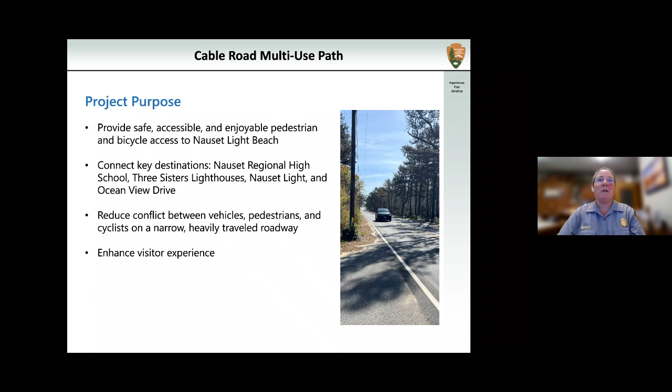You'll hear from Nate Ritchie from the National Park Service's Denver Service Center, the entity that supports parks like ours with projects of this scale, for the next few minutes. Nate, would you please start to walk us through what this project could look like? Thank you, Superintendent Flynn. Yes, I'd be happy to do so. My name is Nate Ritchie. I am the project manager for the Cable Road Multi-Use Path Project.

I'm happy to be with you this evening and tell you about the project. I'm going to talk a little bit about the need, the benefits of this project. We're going to talk through the design considerations, the things we're thinking about as we enter the design phase. We're going to look at the existing conditions, or essentially what is happening in this area now. And finally, we're going to end with the 2 concepts. Next slide.

So benefits of the project, we do anticipate a number. So Superintendent Flynn talked about safety. So we anticipate safer travel for pedestrians and cyclists along Cable Road. We anticipate safer travel for motorists as well, because we're going to remove those users from the roadway. We want to enhance access to Nauset Light Beach, to the cultural areas.

We want to support recreation and wellness programs, and ultimately we want to improve the experience for residents, for visitors, for students, really for anybody who's using Cable Road or Cable Road Multi-Use Path. Next slide.

All right, design considerations. So as we enter the design phase, we are thinking about a lot of things. And if we've missed something here, please place it in the Q&A. It's a perfect time to do so. We are thinking about adjacent residences. We will look at this in a little bit more detail, but there are a number of private properties along Cable Road. Driveway crossings, there are driveway crossings associated with those private properties, so we want to make those crossings safe.

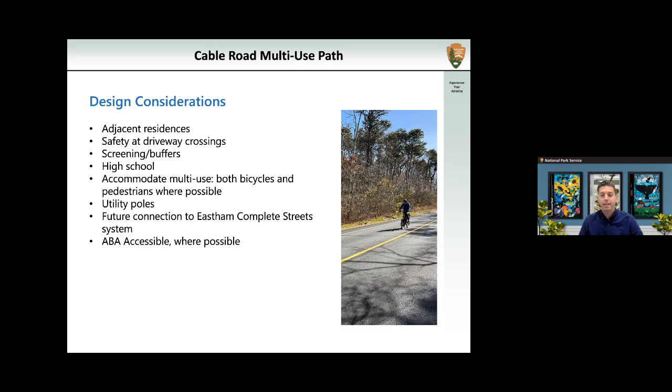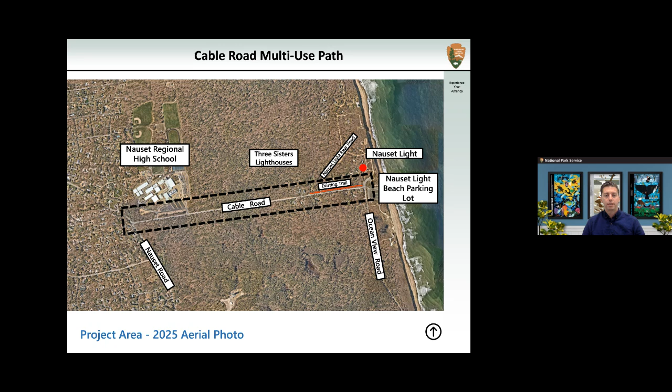So the project starts essentially at the Nauset Light Beach parking lot, and it will terminate at the intersection of Nauset Road. Next slide. We've broken this up into 3 segments, and that's how we'll talk about the project this evening. So going east to west, the first segment will be between the beach parking lot and the Three Sisters lighthouses. The center segment, number 2, is between the Three Sisters lighthouses and the high school. And the third segment is in front of Nauset Regional High School, and it terminates at that intersection with Nauset Road.

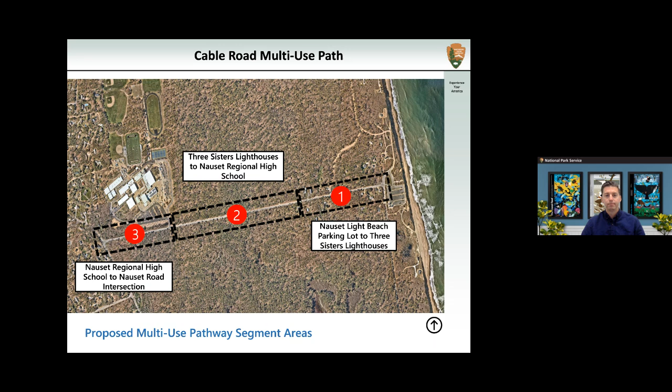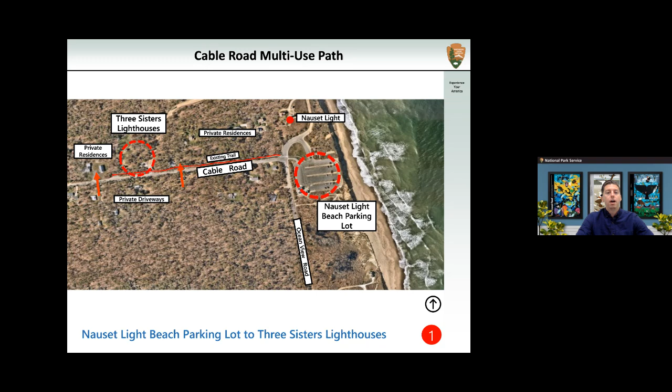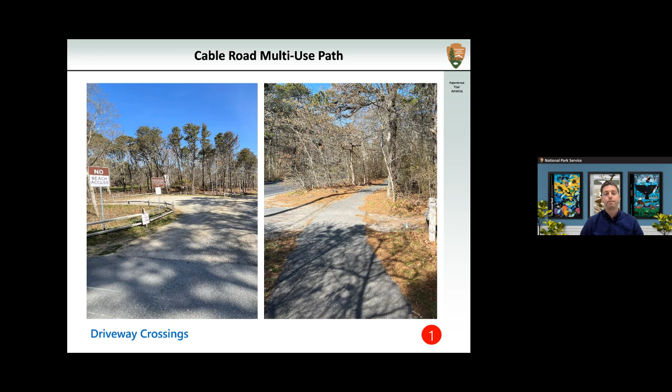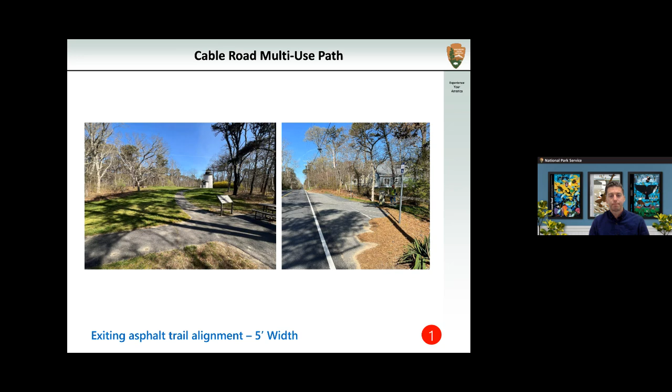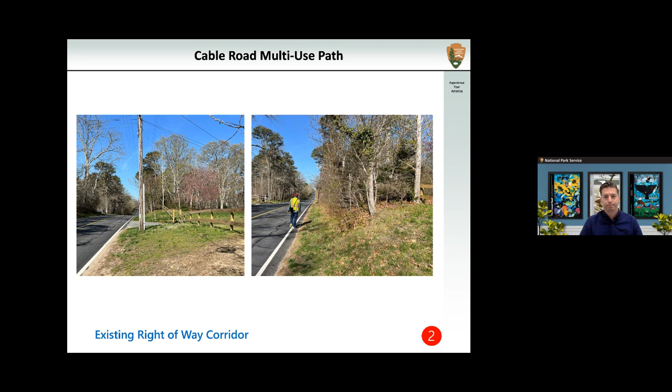Okay, existing right-of-way corridor here. So this is just a little further down Cable Road. We have an example of a private driveway, the image on the left. I will also note there are a few minor drainage features, flumes. There's an example of one of those on the right image.

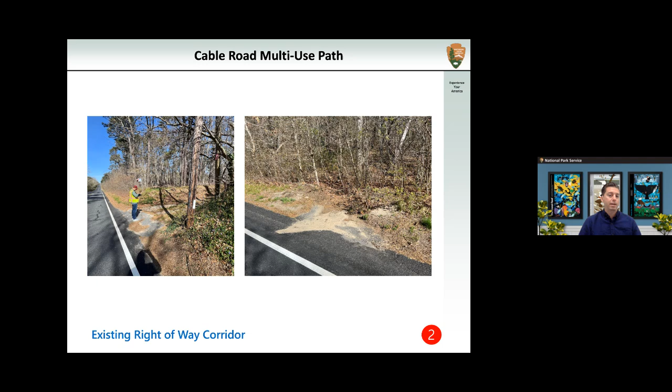And the last photo, we are considering a concept that moves the alignment of the multi-use path a little bit further into the wooded area. This is a sample photo of what that would look like. A lot of trees, a lot of vegetation. You can see just a little sliver of Cable Road to the right of the image there, but you get a sense that it is very vegetated in this area.

Okay, so this is the final segment. This is the segment in front of Nauset Regional High School. There are 2 entrances to the high school, to their parking areas. So this segment of trail kind of goes between those, and it will terminate on the left side of the screen at the intersection with Nauset Road.

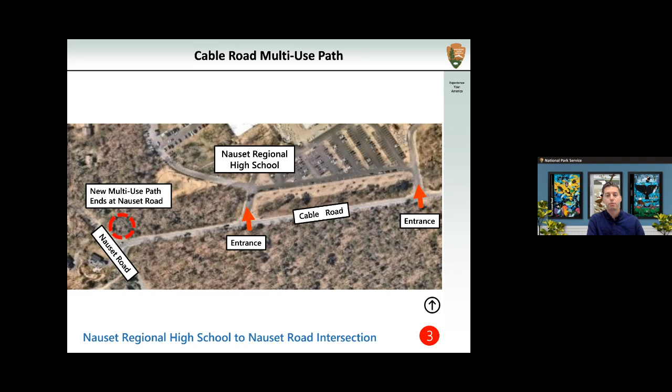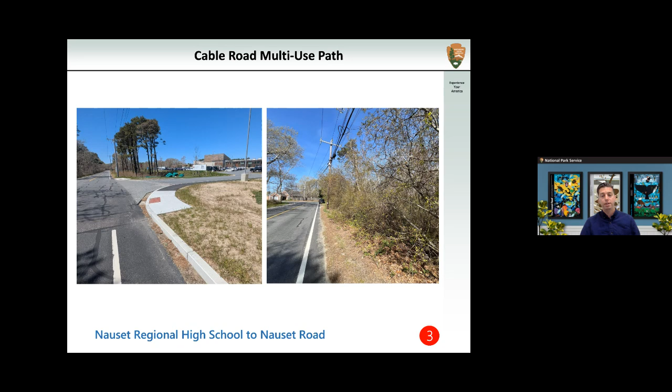So just one set of images here. What you're seeing on the image on the left, you can see the high school in the background there. There is not an existing trail in this area. However, there is a little bit of sidewalk, and that is associated with new construction of the high school. As you get beyond the high school, approaching Nauset Road, that's the image on the right, you kind of return to that wooded condition that we saw in segment 2.

All right, so let's take a look at the concepts. Before I dive into these, a few notes. One is that we are very early in the design process, so we would gladly welcome your comments at this point. These are not the final alignments. We are going to further define these and get into more details, but these are our initial concepts.

The second note is that you'll notice both of these concepts, which are the black dashed lines, are north of Cable Road. I do want to mention that we considered, but ultimately dismissed, an alignment south of Cable Road. There are a number of reasons for that. One is that there are steep slopes, sort of in that segment 2 area in the middle section of the road. There is a section of guardrail. There also were significant grading concerns with private driveways on the south. And one of the stated goals is we want to create connections to Three Sisters Lighthouses, which of course is on the north side of Cable Road. So for those reasons, we ultimately dismissed that concept.

So we're left with these 2. We've got the first concept, recreation, that's on the top of your screen. We've got the second concept, transportation, that's on the bottom of your screen. And you'll note immediately there are quite a few similarities between these, and there are differences. So we'll dive into those now.

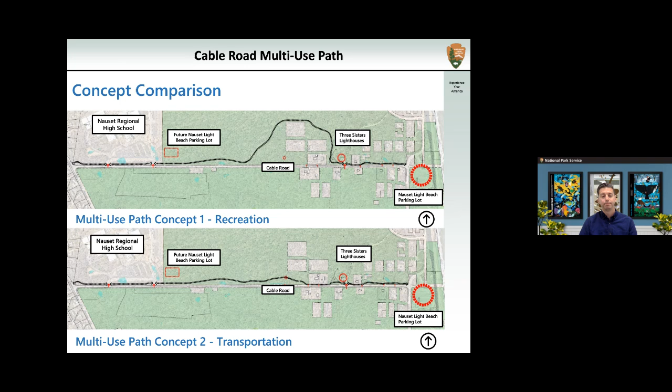We broke these up into the same 3 segments that we looked at for those existing conditions. So segment 1, again, is sort of between the beach parking and the lighthouses. Segment 2 is the center segment between the lighthouses and the high school. And segment 3 is the segment that will be in front of the high school.

So segment 1 is very similar for both concepts. It largely follows the existing alignment of the photos that we showed in some of the previous slides. We do hope to expand the trail slightly where possible to meet one of our goals, which is to provide access for both pedestrians and cyclists. But you will note that in this image, there are some areas, one in particular, where the trail is between Cable Road and a private property, and it will be more narrow in that section. It will be similar to what it is today, so adjacent to Cable Road.

One final note about this segment, and this is true of both concepts: the previous trail alignment went between some of the lighthouses in the Three Sisters Lighthouses area. We are proposing to bring that trail south of that, so between Cable Road and the lighthouses.

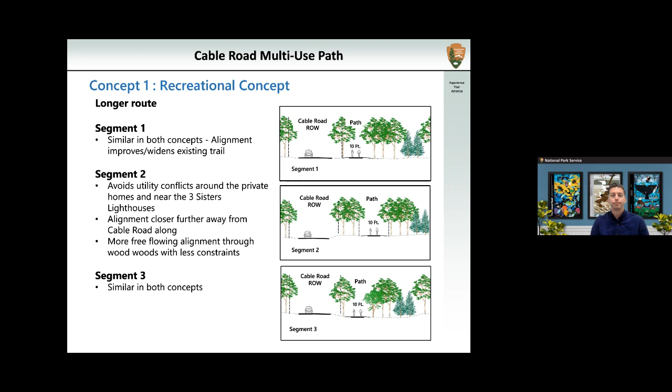All right, concept number 2, transportation. Let's jump right into this. We did separate it again in those 3 segments. Okay, so again, here's segment 1, largely similar to what you saw in the previous concept, does follow that existing alignment. We cross the driveways, we cross the entrance to the Three Sisters Lighthouse parking area. This concept, similar to the previous one, we do slightly change the alignment where we are in front of the Three Sisters Lighthouse. We're proposing to place that between the road and the lighthouses.

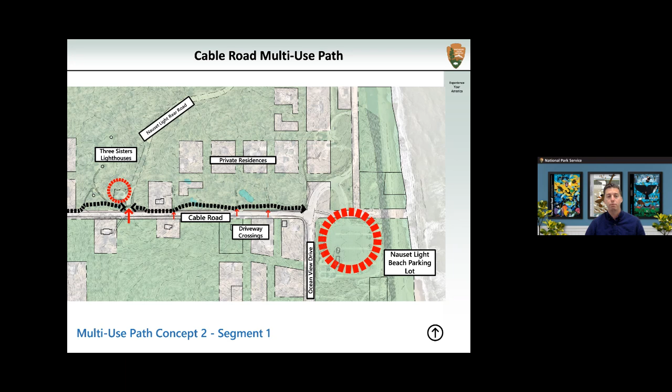This concept in one segment does travel between the roadway and a private property. In that segment, we would have to consider a more narrow multi-use path than the rest of the multi-use path. And we'll talk about in a future slide sort of what that means. It maintains that sort of close connection to Cable Road throughout segment 2, and then you enter segment 3 as you approach the high school. This is the same as the previous concept, parallel to Cable Road and terminating at Nauset Road.

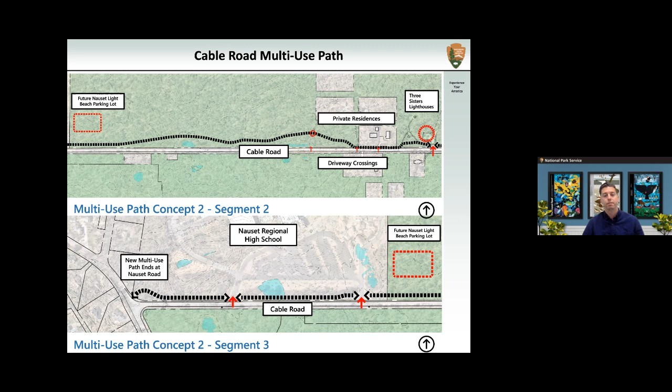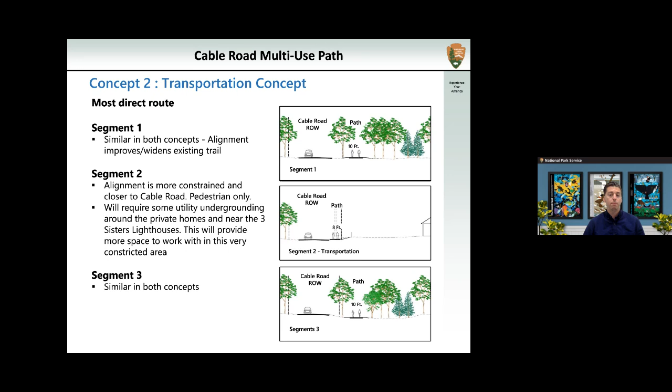Recreation, it's going to be wooded along the trail. You have a limited view of Cable Road, probably hear less of Cable Road as well. The transportation concept, there's not going to be a lot of vegetation between the road and the trail. You would be attached to Cable Road, whereas with the recreation concept, you're separated. Recreation is a longer distance. As I mentioned before, it's in the ballpark of 1,000 feet longer distance. Transportation is shorter distance, much more direct.

And finally, with the recreation trail, we'd be able to maintain at least an 8-foot width, 8 to 10 feet width. So it would accommodate both bikes and pedestrians versus the transportation trail, in particular, where we travel in front of private property. The trail would be more narrow. What that means is that would be pedestrian only. So if you were riding your bike, we would ask you to dismount in that section and walk it.

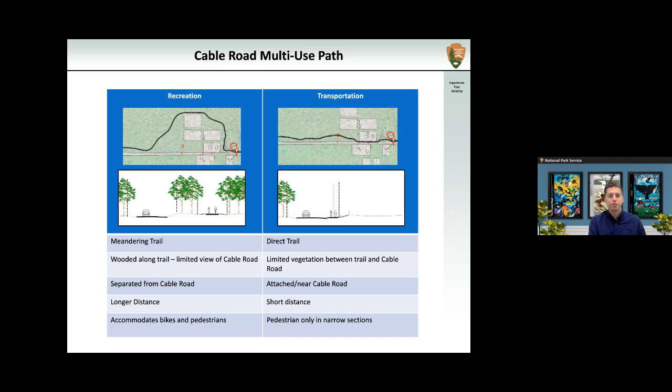I am now going to turn it back to Superintendent Flynn to close this up. Encourage all of you to enter any questions or comments into the Q&A.

Jennifer, you're muted. Sorry about that. That was inevitable.

Nate, thank you very much for that summary of the project and for laying out our preliminary thinking about what this might look like. So this is the point where we really do welcome your feedback. We have a few constants for this project, like the width of the right-of-way. We know what land is public land and available to us to work with. We know the location of utility right-of-ways and existing power lines, but there are also some choices. Do we anticipate that this path will primarily be used for transportation, or is this an additional recreational asset for the community and the park?

Is this really about just getting from point A to point B, or is this about getting off the road and experiencing your park in a new way? Each alternative has positive and negative considerations, but we really want to hear what is most important to you. As we think about this new asset for our community, how do you think you would use it, or you think it should be used?